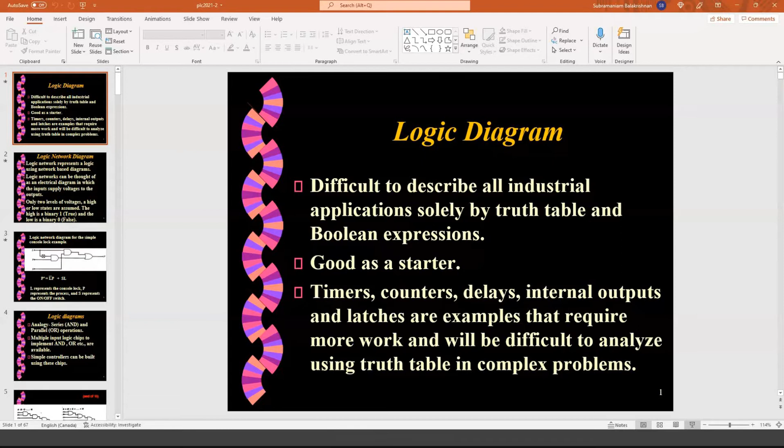Okay, so if there are no further questions on this, I'm going to close the screen and move on. Now, you should be seeing the screen. Let me do it. Okay, do you see my PowerPoint screen? Give me 1 minute. Okay, do you see PowerPoint screen? We can see it, but there's a box in the middle of the screen. Box in the middle of the screen. Yeah, that's good now, I think. Okay, let me go where I stopped.

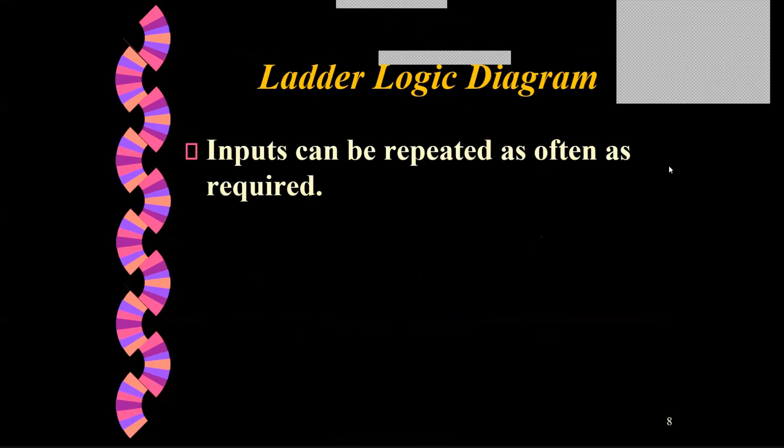The notes for this were already posted and should be there. So end of 12. Okay. So I'm going to revisit, because I'd already crossed the slide, but I'm going to start this case study from scratch. So what we have is a furnace. The role of the furnace is to basically prepare blocks of steel, whatever, for forging. So it has to preheat to a certain level before the forging block is removed and goes through the next stage. At this point, we are not worried about the next stage. We are only worried about the furnace that is preheating the forging block. So how does the furnace heat up?

Obviously, there has to be a heat source. So in this case, assume there is a natural gas heater which is present inside the furnace. So if the natural gas system has to be on or fired, you need the natural gas to be supplied to the head of this flame unit by opening a valve or shutting the valve.

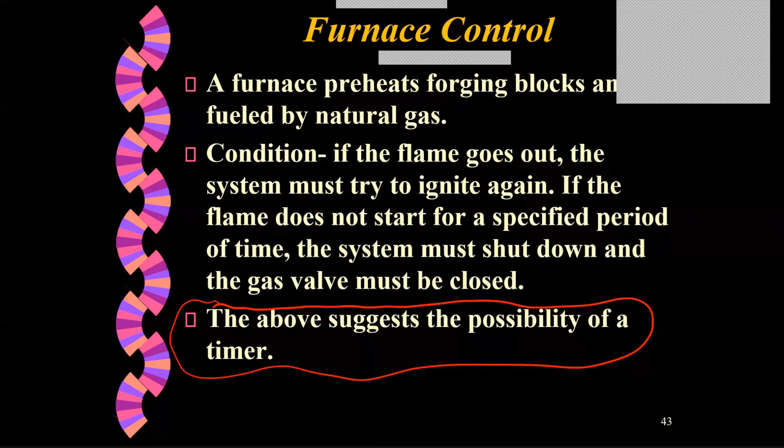Okay, what is this block made of? Is it aluminum? Is it steel? Is it brass or whatever material? You may be having to heat them to different temperatures. So maybe you have to control the intensity of the flame inside. So the problem, as I say, in the real world will lift up to a much more complex control module. Okay, right now I will stay with what I have stated.

So the first step, like every other problem that we have seen before, you must identify the inputs and the outputs. So power must be applied to the system to move on. So the power is an input, which is a switch basically. If the switch is in the on position, it is 1. If it is in the off position, it is off.

So the characteristic of the switch, like in every other example that I have gone through before, has two possible states, 1 or a 0, and also the type of the switch. Is it momentary on, or is it always on when you toggle it? Well, in this particular case, I'm going to assume if you flick the switch, it stays in the on position. If you flick the switch down, it goes to the off position. So either it is on all the way or it is off all the way.

Then the flame. Assume there is some sensor, heat sensor, that is located somewhere to detect whether the flame has come up, which is 1 if it is present and 0 not present. At this point, we are not going to introduce any more inputs. As I said before, the door opening, closing, whether it is open, whether there is a block present, we cannot start adding more inputs.

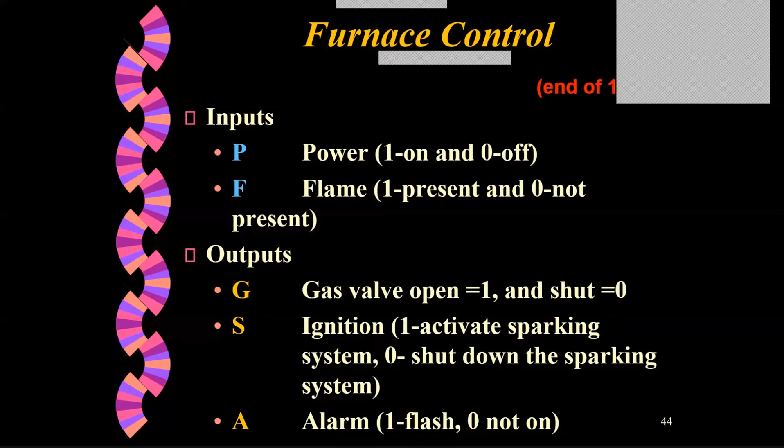Then remember, if the flame does not come on for 5 seconds, you shut down the system. So in this case, an alarm has to come on to indicate that all things are to be shut down. So the alarm could be a light, could be an alarm, like a siren. If it is on 1 and it says flash, that means it could be a blinking light. In our case, it is just on or off, and 0 not on. Okay. So those are the essential inputs and outputs. More can be added. Okay.

Now, to approach this problem or any problem, first put the logical statements to see how the process should be controlled. So the first logical statement is, well, start the ignition, which is the output. And then question, when should that ignition come on? In our case, well, power is a prereq. So when the power is applied and the valve opens, right away start the ignition system on, provided there is no flame.

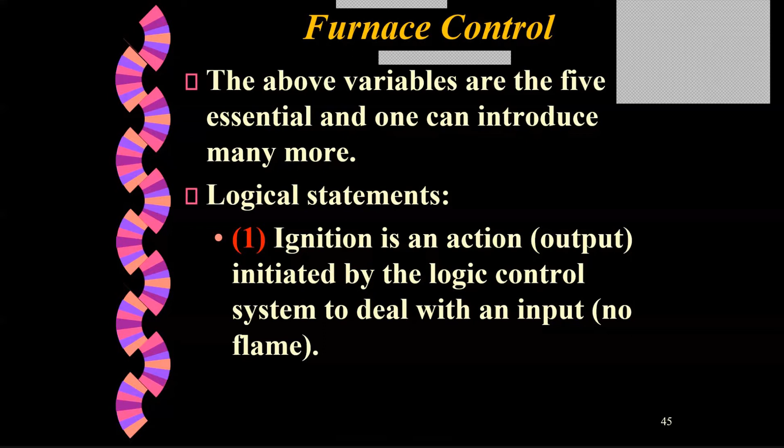Now, looks a little quirky. No flame. Well, obviously, when you start the furnace for the first time, there will be no flame. So you start the furnace when there is no flame, and when the power is applied to start the process, the gas valve will open. Okay, and the ignition will start sparking away. The moment the flame comes on, shut the ignition system off. So no flame is the condition.

Okay. Number 2, the gas valve, the fuel. Only 2 positions, open, close. So the control system must decide when to open and when to shut. Without putting the next step here, I can say this is what's going to happen. At the beginning, there is no flame present, power is applied. So what should be the first thing to happen? Gas valve should open, right? When the gas valve opens, the ignition must come on right away. Okay? So the decision to open or close happens at this stage.

Now one may question, is it okay to get the spark going a few seconds earlier than the gas valve opening, or a few seconds later after the gas valve is open? These are all decisions that you make to suit a certain process. For example, if you take the internal combustion engines, when does the spark come on? Typically top dead center, when the piston is at the top position, fire away. That means the fuel is fully compressed. Some engines require it to be slightly ahead. So advance or retard control of the spark may be a little bit different.

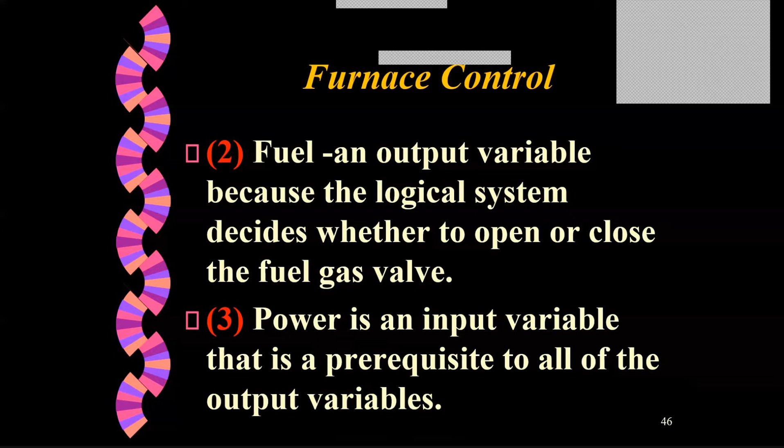So the third prerequisite is power. Power is absolutely required for all of this. Now, here I am assuming the power is on once you flick the switch and it stays on. The problem will become more complex if the power is a pulse input. That means I flick the switch, the command is sent to the controller, in this case a PLC, and after that the power switch can come down to a 0 position. That means off, but the pulse has been sent. The problem will change considerably. Okay, so in this case we are looking at power being on momentary and done. Sorry, the power is on continuously.

Now we said 5 seconds. If all things don't go well, shut the system, and I'm going to give you a period of time. Okay, so a timer is coming into the picture. What is the role of the timer? When the gas valve is open, the timer kicks in and it is starting to count down from 5, 4, 3, 2, 1. The sensor keeps looking at it.

The ignition system is sparking away. At the end of 5 seconds, no flame for some unknown reason. So the timer is going to play a role, and when the timer is expired, trigger an alarm to come on to alert the people that the furnace failed to ignite. Okay? That means the system must be shut down by the controller.

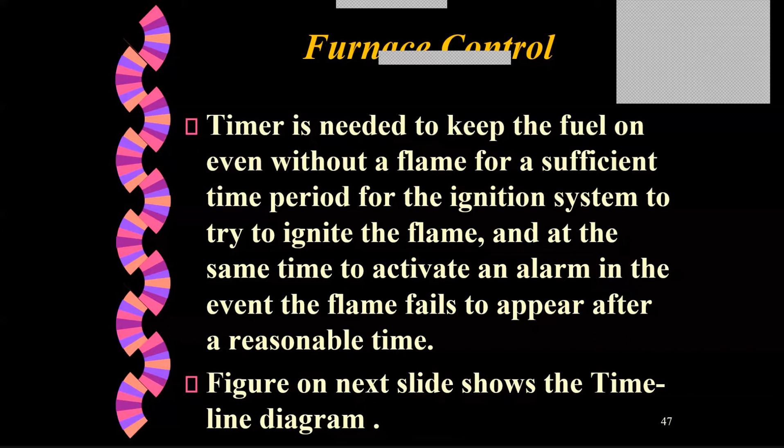Okay? So how would I approach this problem? First, the problem statement must be understood very clearly. Identify for whatever that is required the inputs and the outputs. Then put the logical statements. In this case, I have put 3 logical statements. There can be more, but this is the starting point. The next step is to do the timeline diagram, which we have done in my previous example.

So in this case, you have the three outputs, the G and the S and the A, identified in red, and the two inputs, the power and the flame, P and F. So with this we can do a timeline diagram. So the timeline diagram should basically reflect what should happen in the process if things are going right, as well as some idiosyncrasies in the process, which I will tell you very soon when I explain the timeline diagram.

So what we have is at time this, which is 1 second, power was applied. So immediately gas valve is open. One may question, should it be that instantaneous? Well, these days systems are very, very responsive with a slight nanosecond delay. When the power is applied, gas valve will open. Okay, so what happens here? The S, which is the sparking, that also starts. So P, G, and S are all starting at the same time.

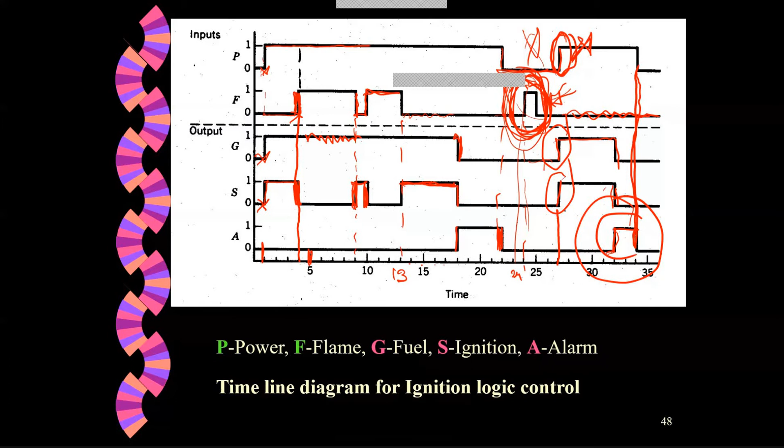Okay, the other example I would give, garage door. When it is closing with the car present underneath, yes, it goes and hits the car, and if you had set the torque correct, it will bounce back and trigger the flashing light to say there is an alarm, right? So things like this must be taken care of in your timeline diagram. Well, I'm not going to look at this slide because I've already explained this in greater detail.

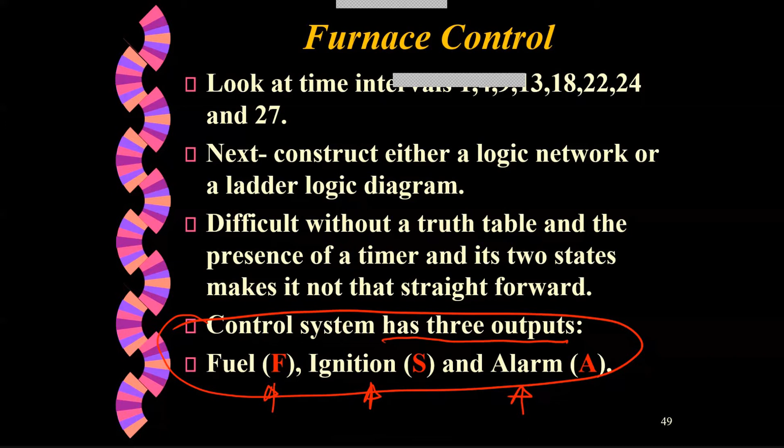Okay. Now let's go to the last two bullets here. Control system has to deal with three outputs in this case: fuel, ignition, alarm. Okay. So we must now proceed to analyze each one of those states and see what needs to be done.

You can go straight to the truth table analysis, which I will show you in the end, because now I am showing you the alternate form of analyzing the logic model for a process by going to the nitty-gritty of the logical assumptions. Even if you go straight to the truth table, you have to understand this procedure of putting the logical statements and coming up with statements. Your life will be a lot easier. If you go straight to the truth table, you will still be struggling.

Okay, on row 7, what should I have as a G or an S or an A? What should happen? Either you can close your eye and put some zeros or ones, and then later on you find things are not right. Or go back to your logical statement from time to time while you're filling the truth table. Okay.

So first, let's take the fuel. Fuel is the gas valve G. In this case, the flame is F, the gas valve is G, and the gas valve is the one that's sending fuel in. What should be the requirement for the gas valve to open? First condition is the power. Second condition is the flame. That means if these two are present, the gas valve must remain open.

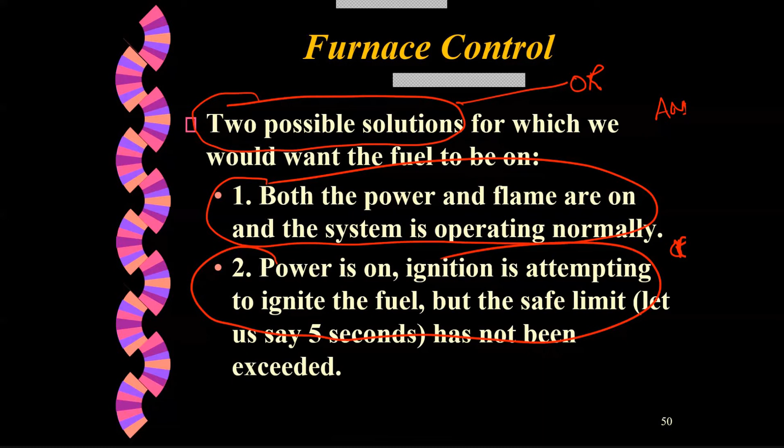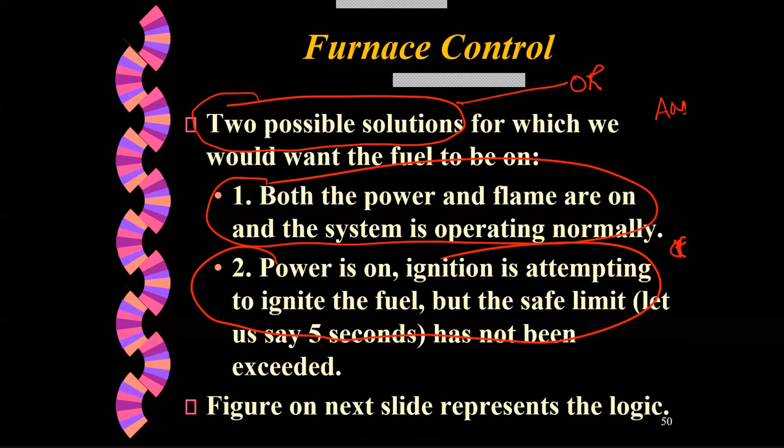But again, to put that system, it is going to cost more. It is possible to motorize your gas valve or your dial, but how much more money? It'll cost you much more. So people don't do it. Okay? So now let's take these first two possibilities. Can we come up with a block symbolic representation of what might happen on this system?

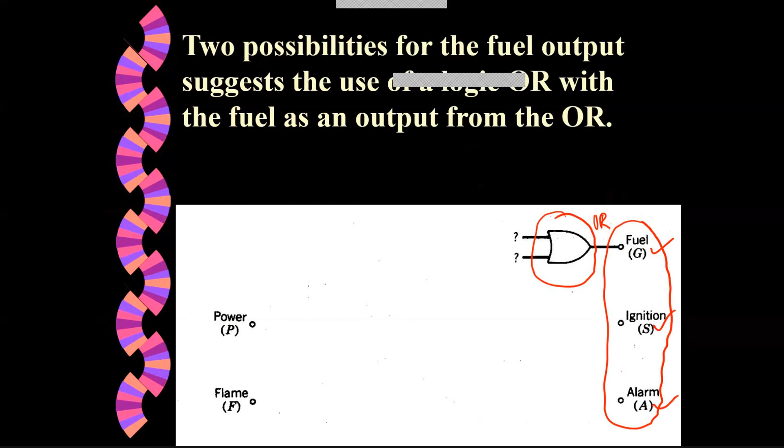So I have identified here what should be controlled as output: fuel, ignition, alarm. I know that the first condition for the fuel from my previous slide, there has to be an OR. Output from the OR goes straight to the fuel. But right now I don't know what these inputs are, so I put a question mark. Here I have got the two inputs in this process, the only two that are being considered, which is the power and the flame.

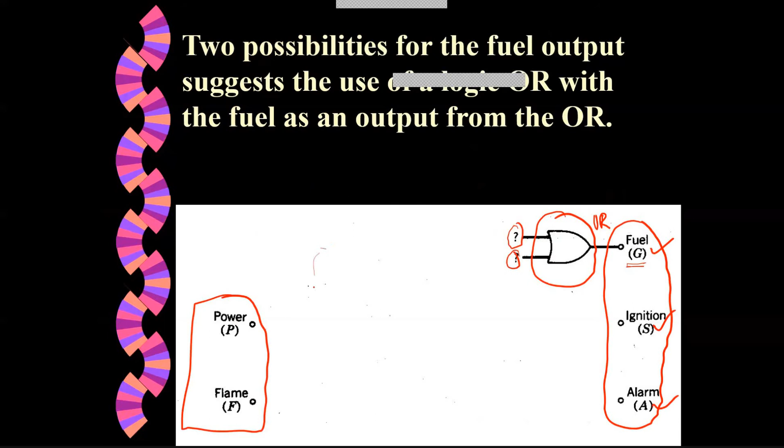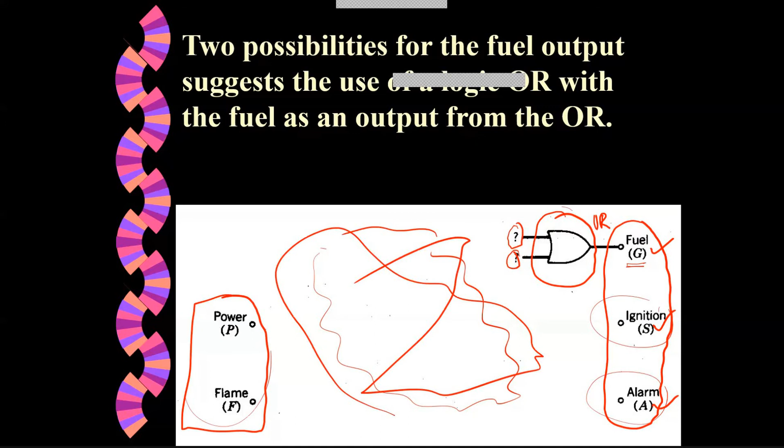Okay, so what's here must be decided. Now we are looking at one output. We have another one to deal with and a third one to deal with just these two. So whatever is here is going to come from your analysis or whatever analysis I'm going to present. Okay. The next slide.

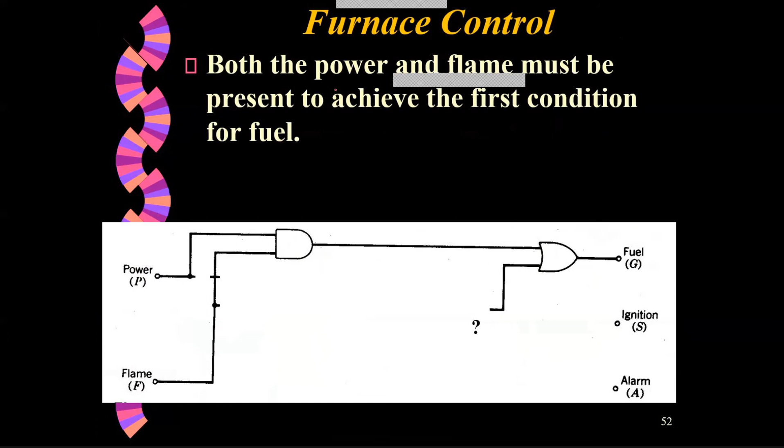Both the power and flame must be present to achieve the first condition for fuel. That's the very first logical statement. Power and flame, both must be present. So both are going into this AND operation. If these two are true, if this is one, I get one. If one of them is not one, I will not get one here. So I know that is one of the inputs to this OR gate.

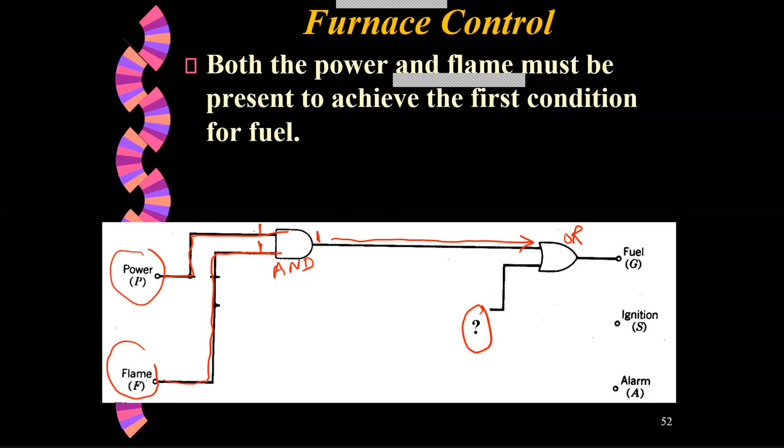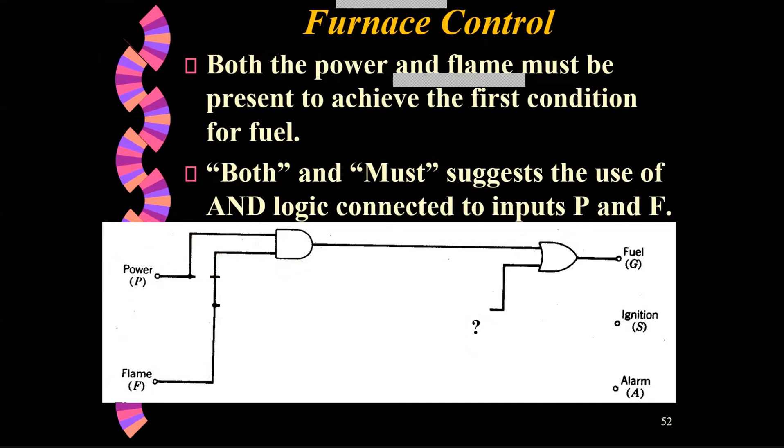Now this is a question mark. So what is the second condition? So both and must suggest the use of AND for the operation of P and F. The other

Do you see something blocking the PowerPoint slide? I gotta move this out.

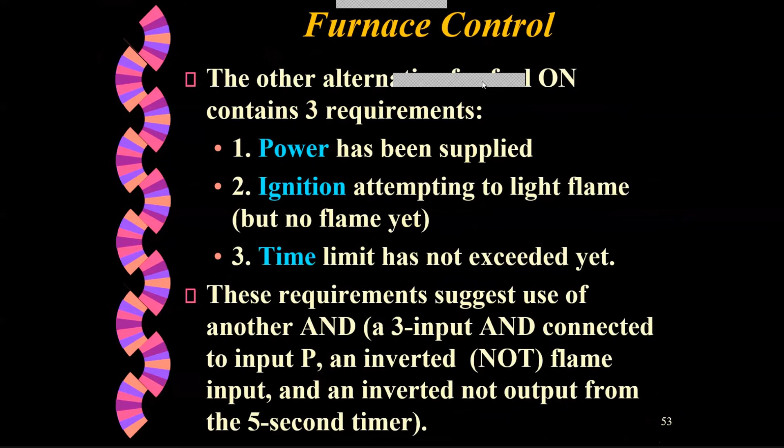Okay. The other alternative for fuel on. Three requirements: power, ignition, and timer not expired. Power is already an input. Ignition, attempting to light flame, but no flame yet. What is ignition? The sparking system. Time. What is that block? It's the time that you decide as to what would be the safe limit before the alarm comes on.

In my example, I am assuming 5 seconds, right? It can be anything. Okay. So power, ignition, and time all must be present. And in this case, since there are three, a 3-input AND connected to what? Input P, inverted NOT flame. That means flame not being present, a flame through a NOT operation. And an inverted NOT output from a 5-second timer.

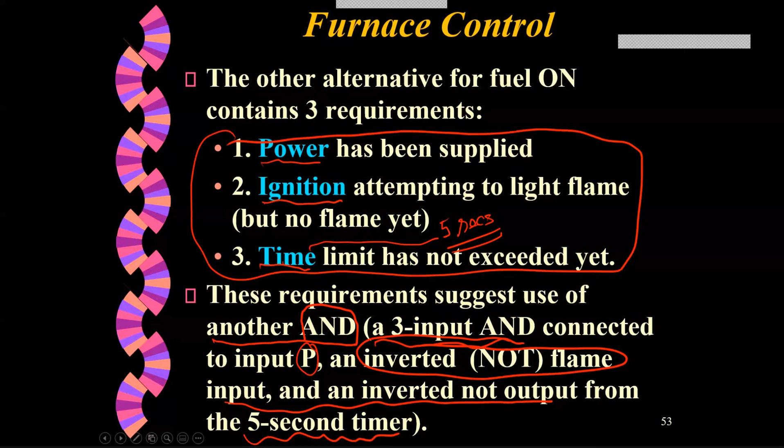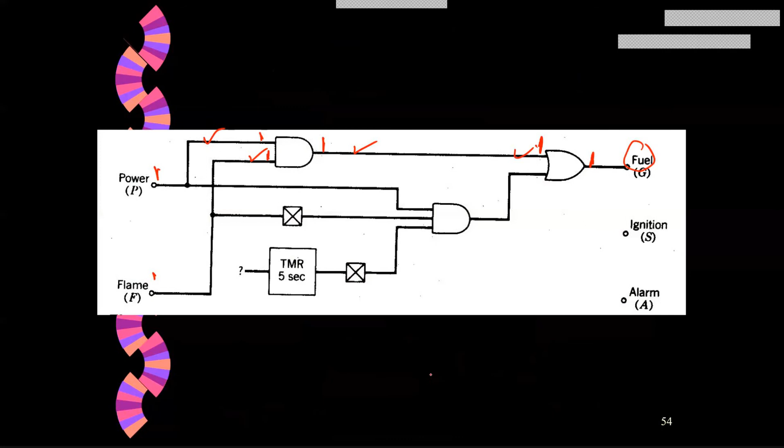These are the conclusions or what you are going to decide based on this condition, where there are three things that should happen. Okay, so using that information, we completed this operation. Fuel is controlled by one of these, either this or this needs to be present. So if I had 1, I get 1; 1, 1, 1, I get 1. Fuel gas valve would have opened. Okay, now this is what we are going to use to put the other input for the OR circuit that's controlling the fuel.

Power is required. Let's assume it is 1, because I showed it as 1. Now flame. Let's assume the flame is here as 1, this is 0, this is 0. What will happen now? If this is 1 and a 0, obviously this will become a 0, no matter what happens to this input. The AND requires all 3 inputs to be 1, right? In this case, I'm not even considering this last section.

Boom. Power is in, flame is in. Now, what should happen to the output here? 1 and a 0 through this NOT becomes a 0, but this will keep the fuel going. No matter what happens to this, this has become a 0, right? So the fuel will continue to play its role because the flame is on, power is on.

Going back here, timer, and NOT operation is going here. The input to the timer is left incomplete, and we have to complete it. So we have to look at the logical statement to see what needs to be done. You need an input to the timer. It's left as a question mark. The way the timer has been portrayed to be working in this course material, the timer needs an input to be on continuously.

For the timer to count down, let's say in this case I store a value of 5 seconds in the timer, and I apply power to the timer, click, click, click, click, it's going to go down towards 0. When it goes to 0, the output from the timer will be true. But the output from the timer, if it has become true, will collapse if the input to the timer is also killed. That's the assumption we are making for the functioning of the timer. There are many variations of the timer.

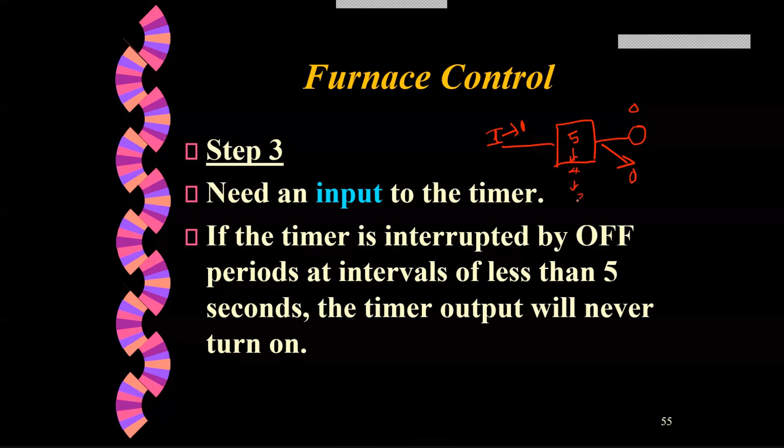So let's look at the situation. I have a timer block here. I have an input, and the timer has got an output. Let's say I store a time of 5 seconds, and the input becomes 1. The timer's output when I do this is a 0. Then this becomes 4, this becomes 3, it continues to be 0. When this becomes a 0, that means it has counted 5 seconds, and this output from a 0 will become a 1.

But if, let's say at the end of 3 seconds, I collapse the input of the timer to a 0, this will remain a 0. It'll go again when I re-switch this to 1. So at the end of 4 seconds or 3 seconds, I collapse, the timer resets to 5, and it starts all over again. So you have to understand that's the assumption I'm making in this statement.

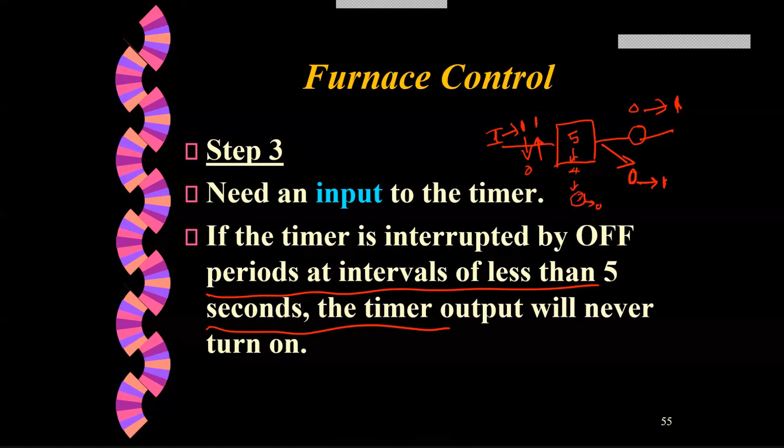If the timer is interrupted by off periods at intervals of less than 5 seconds, the timer output will never turn on. If you make the assumption to be different, yes, it is possible, but it must be reflected in the PLC's logic. Some may support other assumptions, some may not.

Your project number 3 is going to use all of this. In project number 3, the first phase, you are not going to be using any timer or counter. But project number 4, which extends the same problem to another level of complexity, will involve a timer and a counter. So for project number 3, you are looking at no timer, no counter, brute logical gates being implemented into the model. You will see it this afternoon.

So, if the flame appears before 5 seconds, we do not want the alarm to be activated. There is no need because things have stabilized and come back to shape. Okay, so if you take the timer, the time that we are going to be looking at is the period when power is on, but the flame is not present.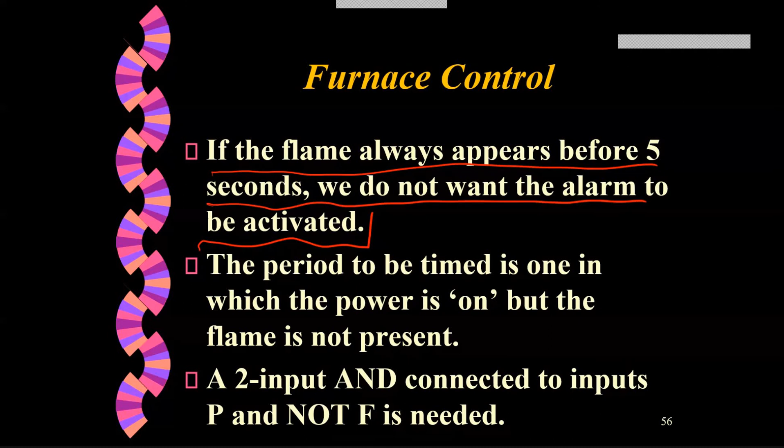Okay, so keeping that in mind, we have to now look at the two possibilities connected to P, the power, and no flame, not F. Okay, so these two states mean you are looking at an AND circuit. Okay, so we were here with the question mark on the previous slide. Now we are going to complete what is this.

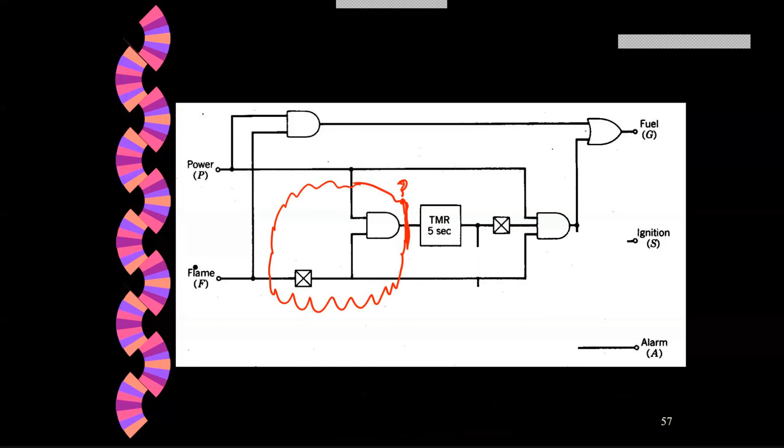P is 1. Flame, let's assume 0 is 0. Output from this AND would be a 0. That means timer is not triggered, right? So here it will be a 0, here it will be a 0, here it will be a 1. Now P is 1, this is 1. What is going to happen here? Flame 0, 0, 1. It goes as 1 here. 1, 1, 1.

Gas valve will be open. Why? No flame. Timer has not expired. Power is still on. You're allowing the gas valve to give the system a chance. Then F, the flame, from a 0 became 1. Flame came on. What should happen to the gas valve? Yes, it should be open. Let's see whether it works.

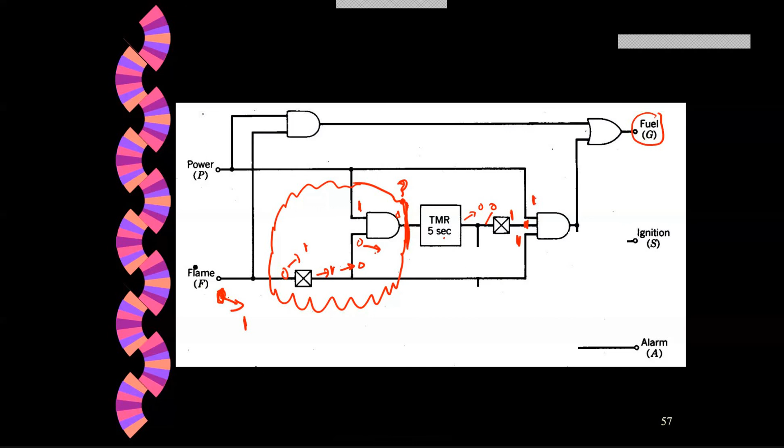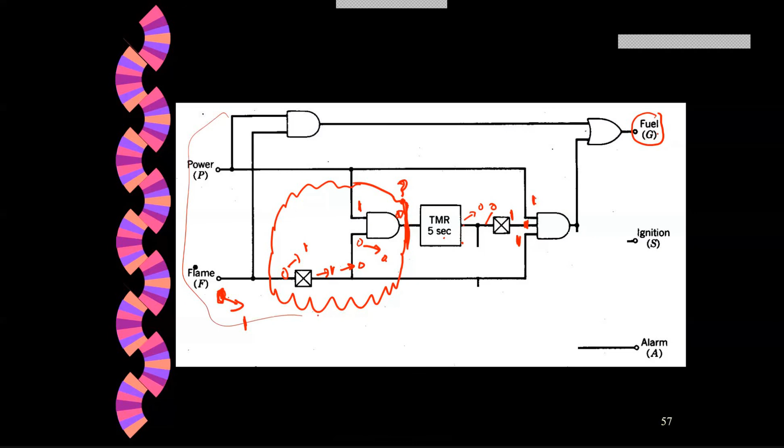This becomes a 1. This becomes a 0. This becomes a 0. This is 0. This is 1. This continues to be a 0. The timer's input is 0. The timer's output is 0. This is 0. This is 1. This is 1. Gas valve is kept going. It's the same condition as was before. So this part of the logic appears to work with my hand simulation.

All that we have done is to solve one output. There are 2 more that are running, right? We've got to complete that. So let's do those 2, which is the last step. Complete the loop for S and A. Okay. Output S is identical to the second input for the OR, which is controlling the gas valve. Output A is the timer output.

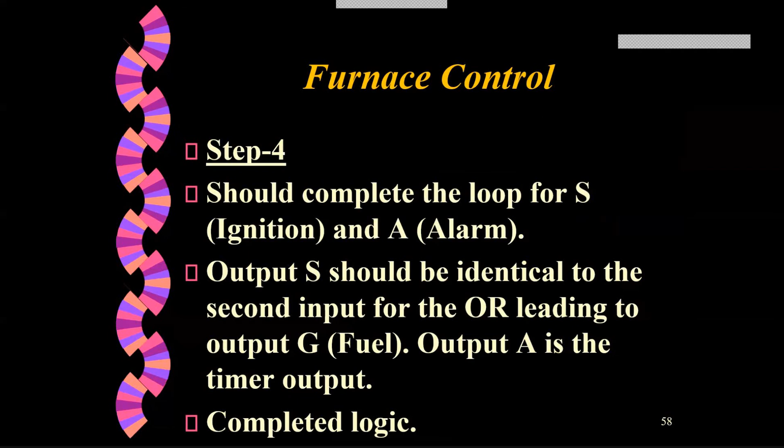Very simple. Now it's just moving in faster because you have solved everything pertaining to this, and this is a key. So whatever is going here is going here, the same output. So this output is now feeding this and feeding this. The alarm comes right here.

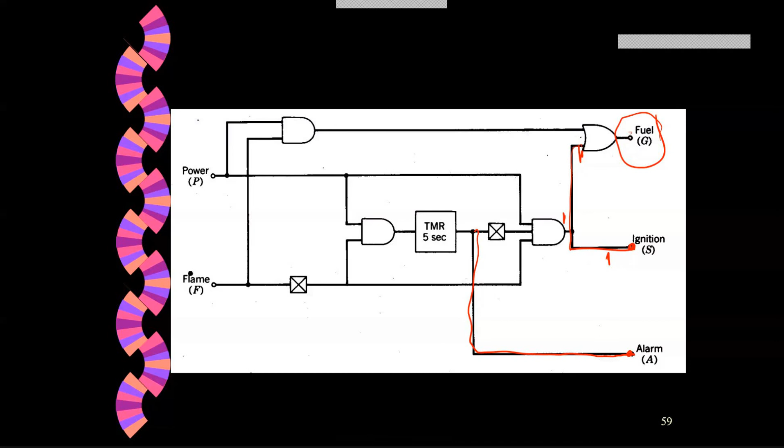Okay, now the usual question that comes up in the minds of people is, if the power goes down, what happens to the timer? Okay, so power 1 is here. If the power is 1, this is 1. If it became a 0, this becomes a 0. This definitely becomes a 0 because even if one of the AND inputs is 0. So the timer input is 0. The timer's output is also a 0. And if this is 0, this becomes a 1.

This is where some confusion happens in the minds of people. If the power goes down, how is the NOT gate still functional? Or when the power goes down, how does the timer bounce back to 5 to restart? Remember, just like your computer, when you switch on, do you have to rekey your date, day, whatever at the beginning? No. It's got a non-volatile memory. And the non-volatile memory could be not needing any power from a digital logic perspective, or needing power.

In the olden day computers or laptops, there used to be a tiny little lithium battery inside, which keeps your parameters intact, like the formatting of the hard disk, the clock, and so on. As long as that battery is good, you have no issue at all. But once the battery goes down, which is usually 5 years, suddenly one day your clock is not set right, your hard disk is going crazy and it's asking you to reset. Okay, so until you replace the battery, which means you rip open everything and look for the battery somewhere inside, nothing will come back.